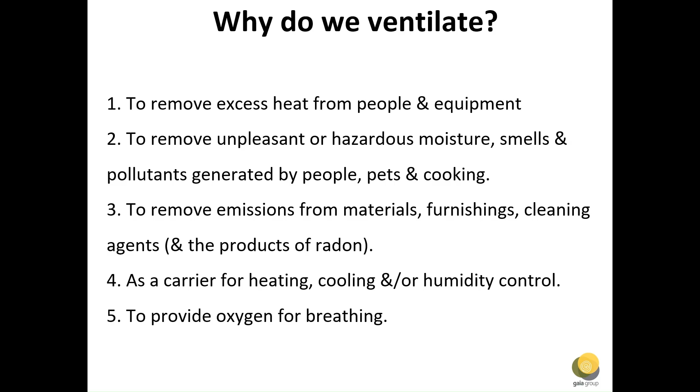So, to more recent history. Energy used to be cheap and free of adverse impacts. The energy crisis of the 1970s led to a massive increase in the price and to increasing attention to energy efficiency and to the sealing up of traditional air routes, such as chimneys in domestic buildings.

No one thought much of ventilating a bathroom or a kitchen beyond propping open a window. In parallel, there was a trend for commercial buildings to be built with deeper plans and lower ceilings than traditionally. Deep plans required air to be transferred to the centre of spaces, often through the ceiling voids, lowering the ceilings further. The mechanical ventilation systems themselves introduced pollution.

Windows were fixed closed, mechanical ventilation and cooling had effectively replaced natural systems. Temperature and humidity were regulated within narrow bands, established by the mechanical services sales team generally, and over which occupants had little or no control. This is when the fashion was for internal environments to be reduced to a profitable, artificially engineered box.

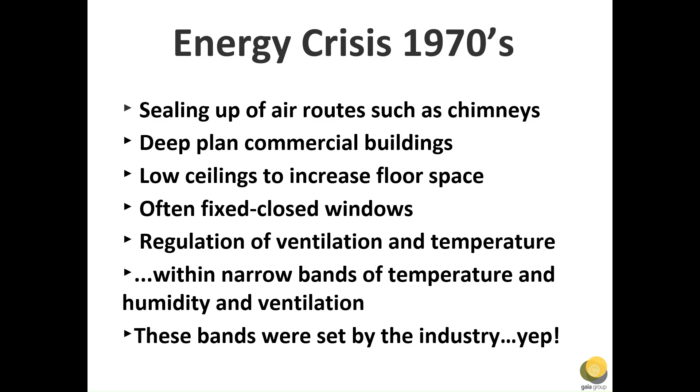It got messy. It still is. At the same time, synthetic materials were replacing natural ones, the combined cocktail effect of which was, and is still, largely unknown, although probably very bad.

Little monitoring of internal pollution has ever been done. If you want to know more about this, then I suggest and heartily recommend this film, 'Unacceptable Levels', which talks about the chemicals inside us.

The approach to ventilation came under scrutiny when ventilation was identified as a very significant aspect of the running cost and environmental impact of many buildings, largely due to the use of electrical energy.

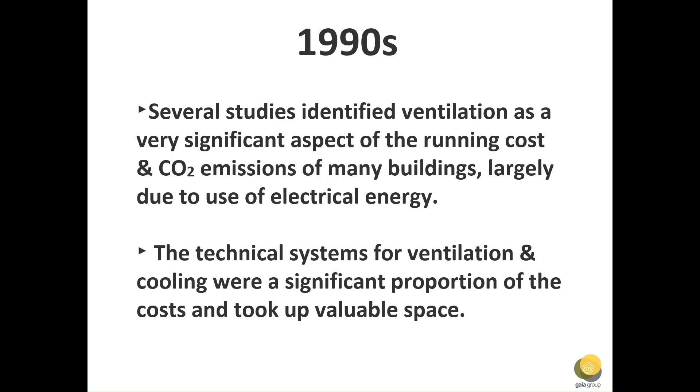Cost analysis highlighted technical systems as a significant proportion of the initial cost of buildings. 30% was not unusual, and they took up valuable space.

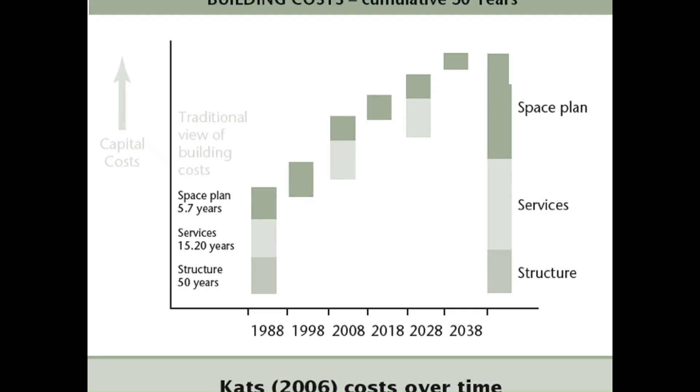Many of you will have come across this diagram that shows how the services actually have an increasing impact in terms of cost over time because they need to be maintained and replaced. There was increasing complexity.

Controls had a lot to answer for. They were often generic, as in you would come into a space and put your hand down a load of switches in order to get to your desk at the far end of the room. They were non-intuitive, not obvious, often obscured behind things, certainly inflexible, incomprehensible quite often, they had high energy defaults, and they quite often turned unneeded systems on.

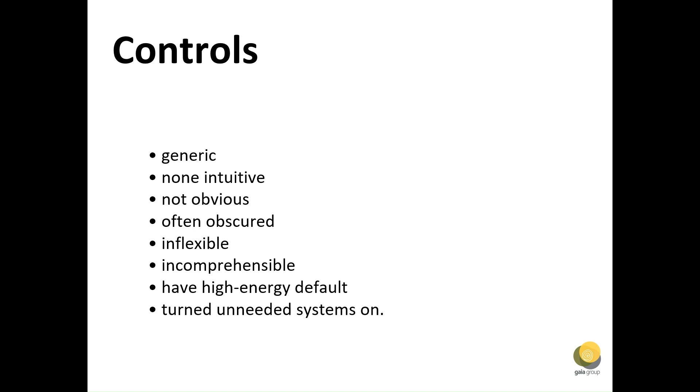Occupants were often dissatisfied with the lack of control over their environment. Poor ventilation systems were often associated with poor indoor air quality and a range of sicknesses which became known as sick building syndrome, and later building related ill health. This showed as high absenteeism in unhealthy business premises and breathing problems related to mould and moisture in housing.

Essentially, ventilation systems were using capital, space, and running costs to replace the larger, taller rooms which had performed quite well without them, and they were making people sick.

For many years, design and regulatory effort to make buildings more energy efficient focused on improving heating and insulation. As a consequence, the proportion of heat loss through infiltration has increased as insulation standards have improved. Internal and solar heat gains have increased in many buildings. Lightweight construction makes them less able to store and lose heat. And of course, the climate is getting warmer.

The outcome is an overriding, muddled message that both leaky buildings and tight buildings are bad, but necessary.

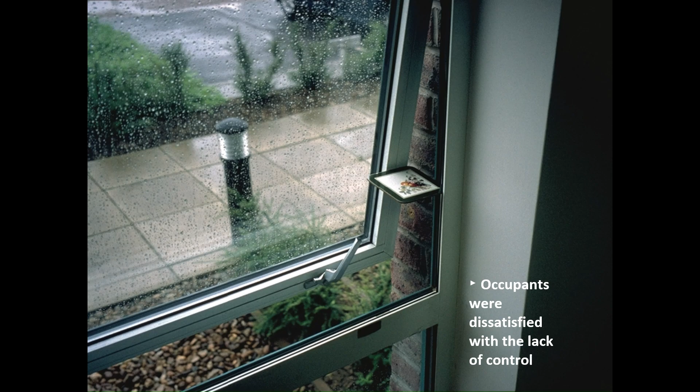Then came some research for those who were listening. There was a marvellous project called Solidar, in which the intention was to design out the building services by attention to design at the early stages. The outcomes were very useful. It showed that building costs came down, that energy demand came down by 50% or more, and that usable floor areas were actually very attractive.

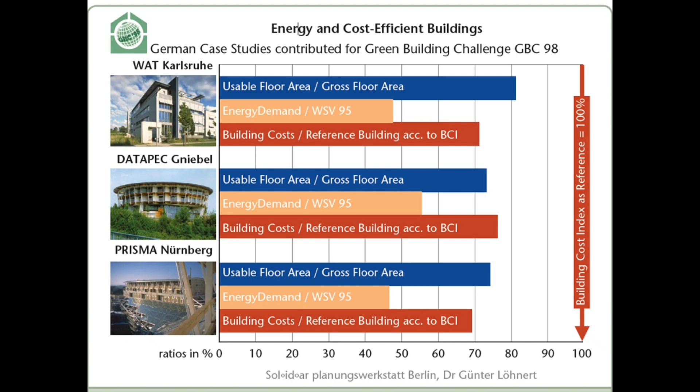It also reinforced something that I have felt throughout my engineering life and was well put by Rolf Jacobsen from Gaia Lista: you can give a lifetime guarantee for every piece of technology that you don't install.

I myself, in the very early 90s, was involved with a project at Oxford County Hall. It was a refurbishment, and the people working in the County Hall decided that they wanted to return to a natural ventilation system with local control rather than keep the existing air conditioning. They were prepared to tolerate the noise and the pollution in the city centre.

This was reinforced by the fact that they had a certain level of control within County Hall for these issues, and they wanted to set long-term strategies for traffic management to reduce that noise and pollution, which shouldn't really be there in the first place.

Within SEDA, there was some fantastic forward thinking. For example, Jed Penton put on this wonderful event looking at vital building syndrome - not what makes buildings sick, but what makes them designed for health.

I worked with Howard and with John Gilbert to produce a design guide for detailing toxic chemical reduction in buildings, to promote healthy internal environments and to minimise future liabilities associated with their disposal. It caused quite some consternation, particularly amongst the plastics community.

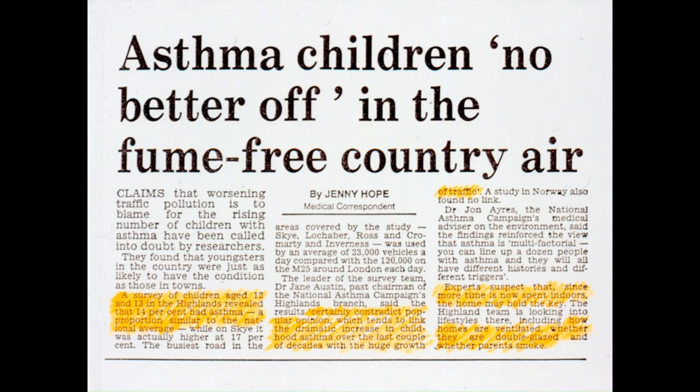There was work done on the occurrence of asthma, which was traditionally related to the external environment, to traffic and such like. What became clear was the incidence of asthma was the same on the Isle of Skye as it was in central London, and this allowed a focus to come back to common factors such as the homes that children were in and spent a significant amount of their time in, as potentially being a very strong interfering factor.

There's a rising interest in moisture management and the potential for moisture buffering materials to buffer oscillations in relative humidity. So this is an example of the internal RH and the external RH in a building in the borders.

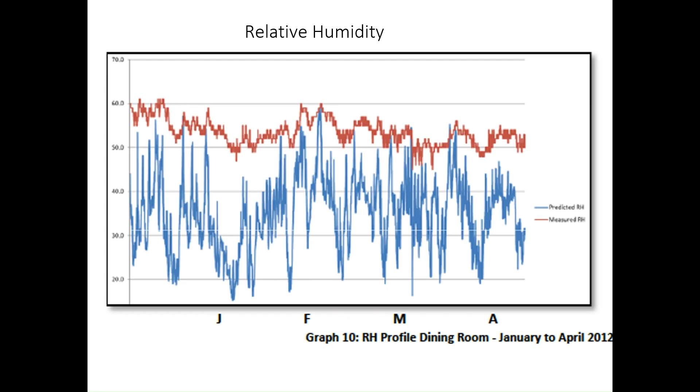It was shown in practice by designers using clay in bathrooms, which actually absorbed and buffered the moisture there, meaning that things like your mirror didn't steam up.

I also undertook some work into air quality and health for people with dementia, and this was related both to the very high occurrence of breathing related ill health amongst older people, but also to giving attention to the buildings that people were in. One of the things which is vitally important to people with mental disabilities and problems such as dementia is that they really enjoy visitor time, but unfortunately many of the environments that people are in are unpleasant and badly ventilated, and people really do not want to stay very long.

We looked at a number of design approaches to increasing the amount of air that you can get into buildings without that having a significant energy penalty. And there are some case studies that I could discuss.

The tradition of design thinking has moved again, away from fully managed mechanical design solutions to an understanding of context, natural process, and awareness of human factors. Commercial buildings have moved to much greater flexibility, hence the appearance in recent years of what has become known as mixed mode or hybrid strategies. These combine approaches rather than providing one fixed solution for everywhere.

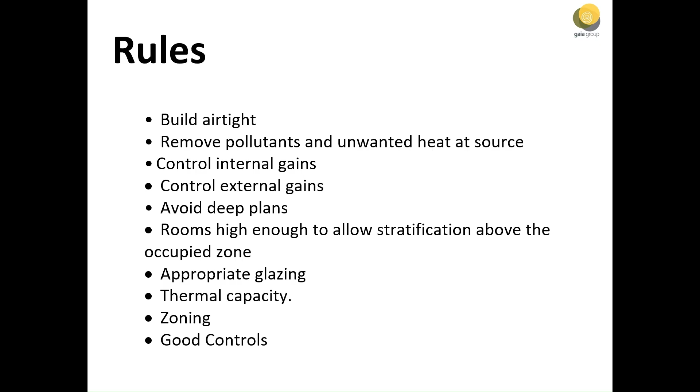Spaces need to be designed with more attention to detail in the early stages of design, and be easy to understand and control by occupants and managers. We need to consider how spaces will be used, and we need attention to eliminating avoidable heat gains and pollutants. In fact, ventilation and cooling need to be designed on a room by room basis, not a building by building basis, to meet the potentially very different requirements of different users at different times and places within a building.

This may be as simple as placing the openings in the right places, but if relying on windows for ventilation, then it's worthwhile remembering that windows are required to fulfill a very large number of tasks. They are there to provide light, to provide connection, to provide views, and if they are there to provide air, then success is probably in the detail.

There's plenty of guidance available on ventilation and cooling, but most buildings either fail completely to create indoor environments that are comfortable and healthy, or they consume lots of unnecessary energy to be less comfortable and healthy than they might otherwise be. In 2002, driven by a desire to know more about designing ventilation in buildings, particularly in schools, I organised a tour of school buildings in Norway.

One of the first we visited had a very interesting engineer. Dagfinn stated, 'Good indoor air quality is a human right.' It felt like a very different fashion declaration to that which I was used to. It sounded like the kind of fashion declaration that people with dementia, and people who work with or visit people with dementia, would really value. It sounded like the kind that teachers, school children, office workers, and people who live in their own homes would really welcome. Good indoor air quality is a human right.

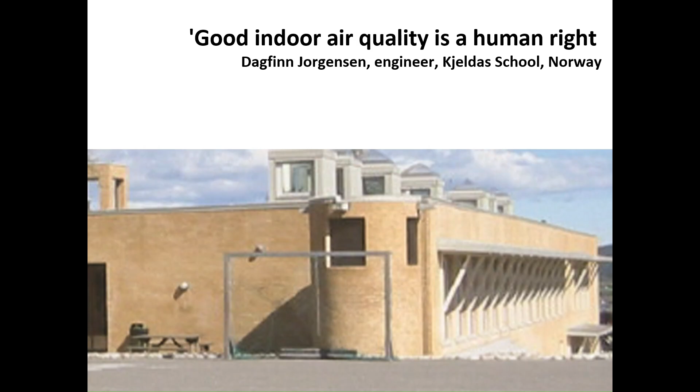The schools that we visited form some very useful case studies, and they are encapsulated in these two books, Design and Construction of Sustainable Schools, which includes German examples too. They are downloadable, I believe, from the SEDA website. Any problems, ask me, I can get you them.

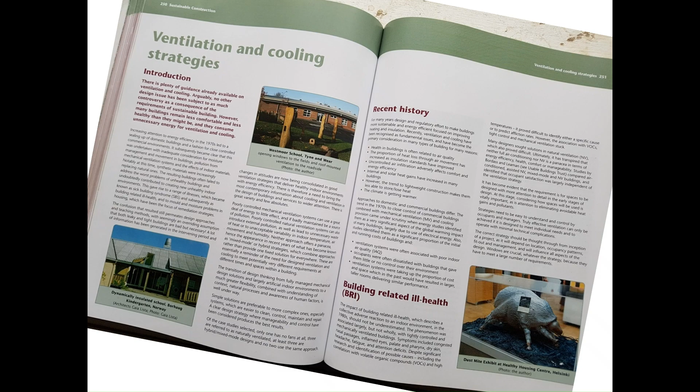My email is sandy@gaiagroup.org. And then there are a whole load more ventilation and cooling examples in my book Sustainable Construction, the second edition, and actually some interesting ones in the first edition that might at some point be worth revisiting. These include Vanse School, with a rather nice culvert system and a Bernoulli effect, a dynamic insulation at McLaren Borhaug, and the Baerum care facility for the elderly.

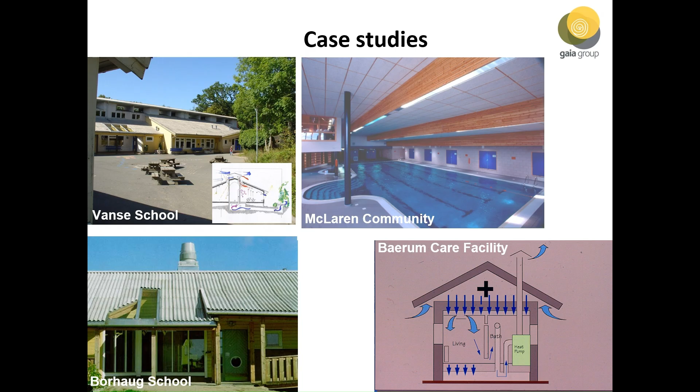Building 2226, a housing project at Toll House Gardens, Kjeldas School, housing designed as healthy housing in Zurich, Plummerswood passive house in the Borders, and then there's work on the Bullitt Center, which of course had the red list for material specification. All of that can be found in Sustainable Construction Volume 2.

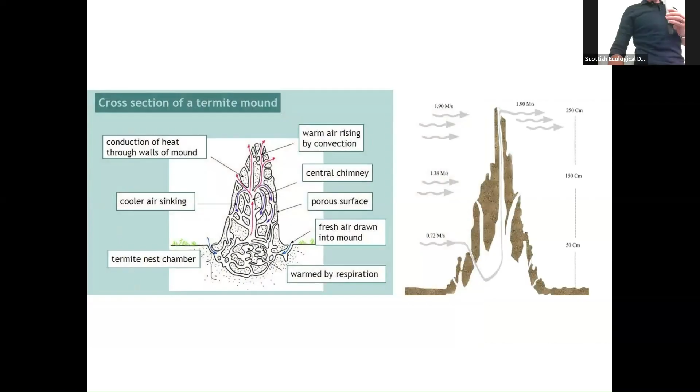And then there's termites. You've all heard about termite mounds, and you know how they draw in cool air and use it to drive air through the building. But one of the things these have in common, and which Sandy touched on, and I know Janice is going to touch on as well, is the materials these are built from. These are not hard, impermeable materials.

So what we build our buildings from is a fundamentally important part of that ventilation strategy too, to help buffer the moisture, to help store the heat and put it out when you actually need it. And that's what nature does intrinsically.

Right, last thing. I work for an organisation called NatureScot, and this is a great title, I'm their net zero team leader. We have to retrofit 40 buildings, and my challenge is how to do all this good stuff I'm talking about and build it into the architecture. So that's going to be a good challenge. Keep your eyes peeled for what we do. Thanks very much.

I won't talk at length about ventilation itself because there is a lot of expertise in the room who will do that. I'm going to talk around the issue of why it's important to get it right, and who might be most vulnerable when we're thinking about designing solutions.

So that looks like it's all working lovely.

So yes, for those who didn't hear online, this is really my favourite quote of the week. This quote comes from 1965, so to give a little bit of context, this is around the time when the civil disability rights movement started to gain traction, and the organisation who published this wonderful journal at the time called The Magic Carpet, it became the Disabled Drivers Association. And this quote was in the editorial of one of the 1965 issues, and I'll read it for anyone who wants to hear. So it says, 'To hell with the half-witted architect who dreams up fabulous ornamental buildings with not one scrap of common sense about them. He may be a great man or woman, but how much greater he could be if his dreams were less like nightmares to a percentage of the population.'

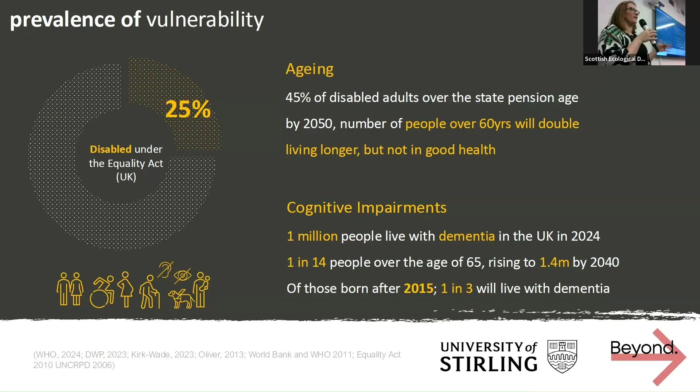One of my background areas is working in dementia design, so I think it's important to think about this bracket of vulnerability and people who live with cognitive impairment. At the moment, approximately 1 million people in the UK live with a type of dementia, but this number is set to rise. By 2040, we're looking at a rise from 1 million up to about 1.4 million. The World Health Organization identified that of those people born after 2015, 1 in 3 will live with dementia in their lifetime. So the prevalence is on the rise as well.

I particularly liked Sandy's slide with the quote around air quality being a human right. I talk a lot about rights in my PhD, and it's about remembering that disability rights are also human rights. Rights are rights no matter who you are or what type of vulnerability you have. When we think about what those rights are, it's about dignity in your life, choice, independence, and the ability to have equal participation in society. So if you're particularly vulnerable, you might need additional support, or additional considerations in the design process of buildings and places to be able to enact your own human right.

Over the next few slides, I'll give some examples of the way in which we might see inequalities through the use of ventilation in an inappropriate way, or just not being considered fully to be inclusive. In the case of people living with dementia, there's some quite interesting research that's come out recently, and it's very much in line with Sandy's wonderful book around the quality of indoor air.

The first point is about discomfort. When you're sitting in an environment where the indoor air quality is poor, you experience discomfort. Some really recent research has indicated that this level of discomfort within a care environment is very much likely to increase stress and distress behaviour responses. So from a carer perspective, it becomes a little more difficult to support people who experience this sort of indoor discomfort.

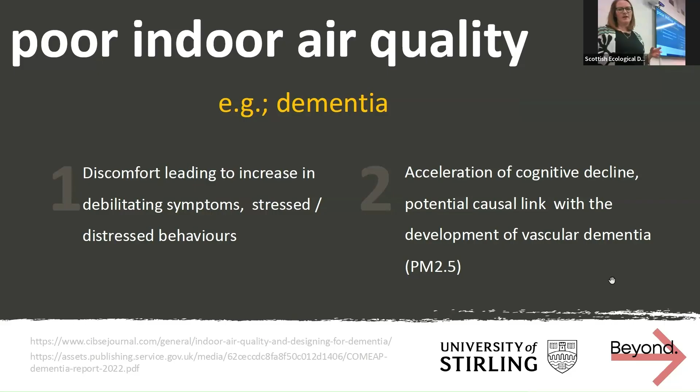Thinking about controls, this is maybe kind of a common sense type of thing. But if you're somebody with reduced mobility, for example, you might not be able to easily access vent controls. You might feel disempowered by that, and that might increase your reliance on support, where otherwise you might be very independent in your life. If you can't reach the trickle vent at the top of your window, or the window behind your kitchen sink because you've got a counter in front.

I myself know that just through experience of having a giant baby bump in the past, and that's coming to me soon. That idea of the disempowerment experienced by people who find controls inaccessible is massive. There's lots to go into detail there, but I'll keep moving on.

But the other end to think about is people who live with reduced mobility, again, spend a lot more time in an indoor environment, and they're much more susceptible to developing related health conditions and illnesses, because they're spending that much more time indoors as well. So there's sort of a duality of issues happening there.

When we think about thermal comfort in relation to ventilation, again, another kind of common sense slide, but thinking not just about older people, but about infant babies and children and the risks they face if they're in a space that's too hot for them or too cold. This is all related to getting the systems right and getting them user friendly, and thinking about that range of people who are going to be in a space.

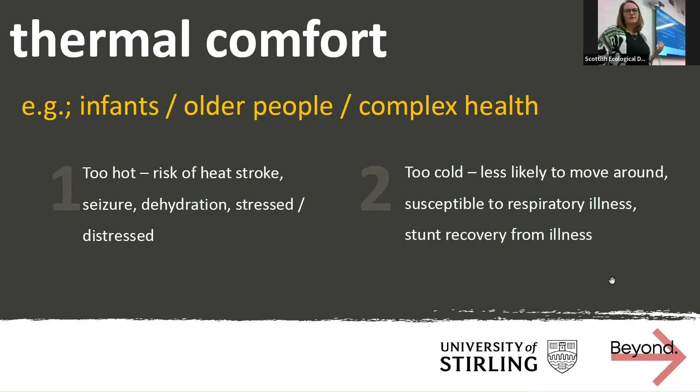When we get to the 'who cares' part, I won't be able to go into lots of theory around disability theory and what the social model is, but in a very quick snapshot, the social model of disability situates disablement as something which is a result of external barriers which interact with a person's impairment or health condition. We must understand the disabling power of the built environment, that people are disabled by barriers in the built environment. That's really the message to architects whenever you're thinking about creating accessible spaces, spaces that cater to people's needs or are considerate of a range of needs.

It's the power of the built environment to disable people that is really massive. So I've reiterated that point here when we think about the cross-section of our population and the disabling power of the built environment. That's why it's important to architects and designers of places and anyone responsible for the built environment, because the social model of disability is not a new concept. It's been around since the early 1960s and defined formally in 1983 as a term, but people have been talking about the reason why they feel so disabled being all of these external factors.

The final quote of my presentation is around the World Bank and the World Health Organization's report on disability. The last one they released was back in 2011, which feels like quite a long time ago. I think there should be an update, but that and the UNCRPD, the UN Convention on the Rights of Persons with Disabilities, they all identify the environment as having a huge impact on the experience and extent of disability.

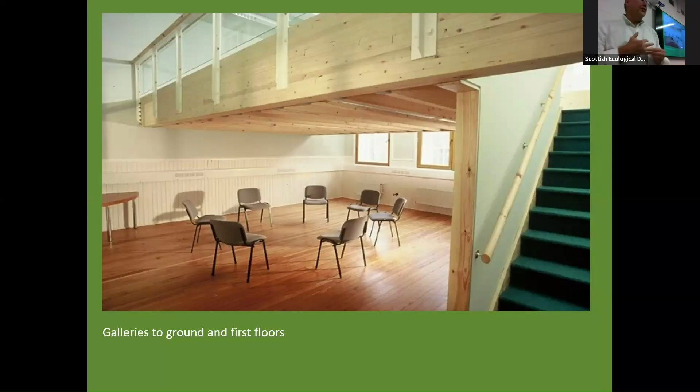Obviously all the windows open, so in summer when you're not heating the building, you open the windows. On the ground floor and first floor they have mechanical heat recovery as you'd expect. It's also on the top floor. It's 3 floors mainly, but the top floor also benefits from a solar slate system.

The ideas behind this were developed by a guy called Kerr McGregor, 20, 30, 40 years ago - sadly no longer with us, a really clever and interesting guy. He was looking at how you control the buildup of moisture in older housing association and local authority flats and houses. He was looking at MVHR as a moisture control more than how it's being promoted at the moment, particularly looking at popping these things into communal stairs in blocks of flats.

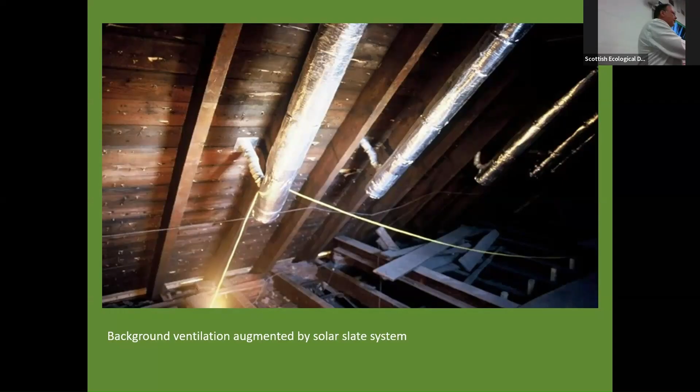What this does is suck air in from underneath the slates, and that's the intake air for the top floor MVHR system or air handler. Obviously in summer when it's warm, it clicks over to fresh air from elsewhere - you don't want to bring in warm air. It's astonishingly efficient. This part of the building has been heavily monitored by both myself and others.

This particular slide comes from around 2000 when the BRE monitored it, and it shows over a period of time in the middle of winter the air temperature coming off underneath the slates, which act as plate heat exchangers effectively, against the outside air. There's one day in there - for those of you online, I'm about to point at the slide, you won't be able to see it, but it's the one where the lines are at the top. I think it's somewhere over here, sometime in January.

Outside air temperature is 0. The air coming off underneath the slates is 21 degrees centigrade in January - one of those really bright, sunny winter days. So you don't need any additional energy to heat that air. It makes a huge difference.

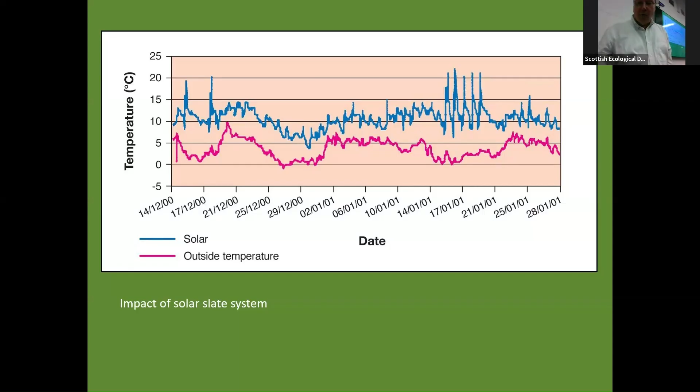I also got the opportunity when doing my PhD to go back and do a post-occupancy evaluation of the building, using 3 different methodologies - more to learn about those methodologies than the building, but we still learned some interesting things. One thing I was able to do was monitor temperature and relative humidity in some of the spaces - not as much monitoring as I would have liked, but still it's there. And these are the results.

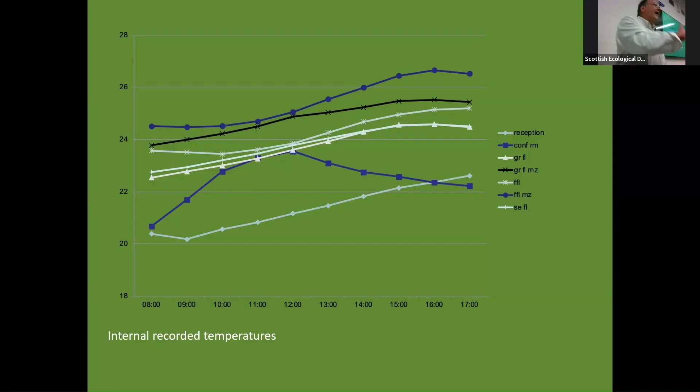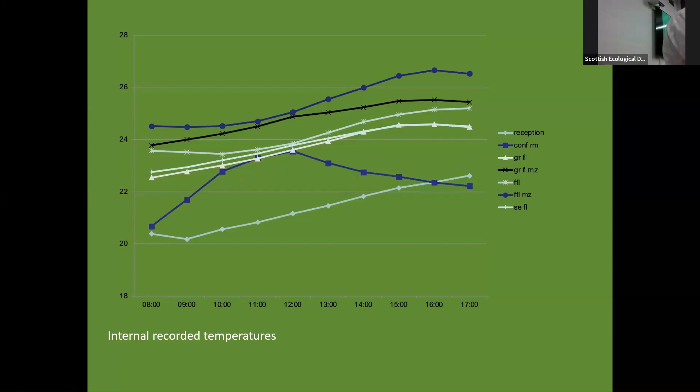As part of the post-occupancy evaluation, alongside doing all this monitoring, the user satisfaction questionnaire does loads of Likert scores as always, but it also allows people to make comments. Predominantly from the southwest corner, there were all these comments from people saying, it gets too hot in the summer, but my colleagues won't let me open the windows. That's almost a direct quote. And you can see that it's getting to 26 degrees.

What the facilities management team in place at the time had forgotten, or hadn't been told by the previous facilities managers, was all they had to do to help - not solve, but at least reduce the impact of this issue - was at night go around and open all the inner windows.

So you've got an outside window, sash and case, with a U value of 5.7. You can leave that closed, but you've then got another window on the inside with a U value of 1.1, which you can open without any impact in terms of rain or wind or whatever. And overnight, you shed 4 degrees.

So the facilities team have now been reminded of this, and that's what they do. It provides a zero cost management solution.

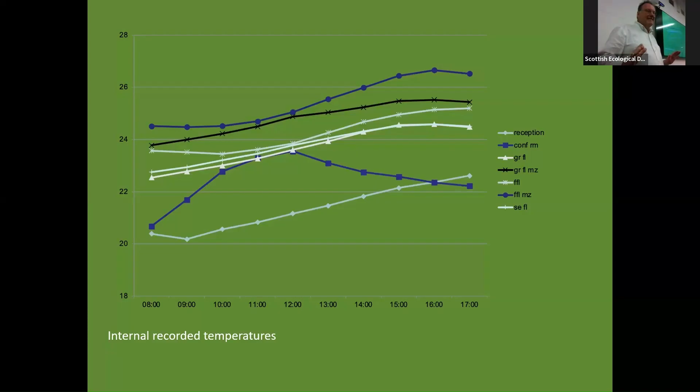One of the things I think is interesting about that, and it goes back to the discussions I was having with the client right at the beginning, is having the opportunity and taking the time to have a risk-based conversation with your client about whatever you're designing. Some clients are incredibly risk averse. I've had clients say, look, I want you to give me a system that is turned on and I never touch it and it does everything for me. I usually say at that point, I don't think you're the right client for me, because if you're not prepared to manage your own building, don't expect the best possible results.

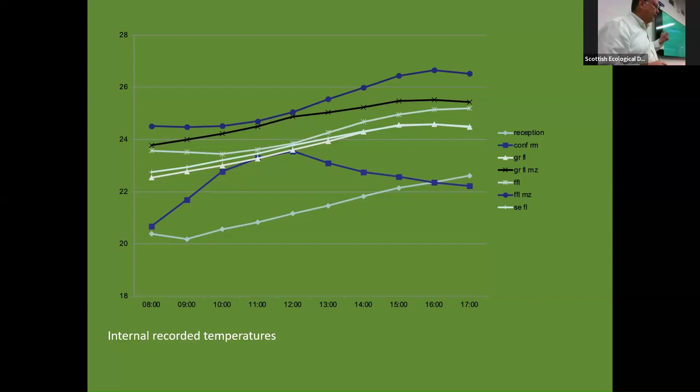But it reinforced some of that sort of risk-based conversation that I had with the client, which I'll illustrate with the next case study. I've got, I think, one more slide just for this - yeah, one more slide on this one.

Bearing in mind, a lot of the studies that I've done have been for educational buildings, because it used to be part of the funding for new build educational buildings that you did one of these, and academics just like doing these sort of things. So predominantly they're across education buildings, and predominantly a lot of those buildings will have started out with some green aspiration attached to them.

Now, like I say, this was done on the very hottest day of this particular year, so people were probably quite grumpy at the time, and they hadn't rolled out, or had forgotten, the solution to it.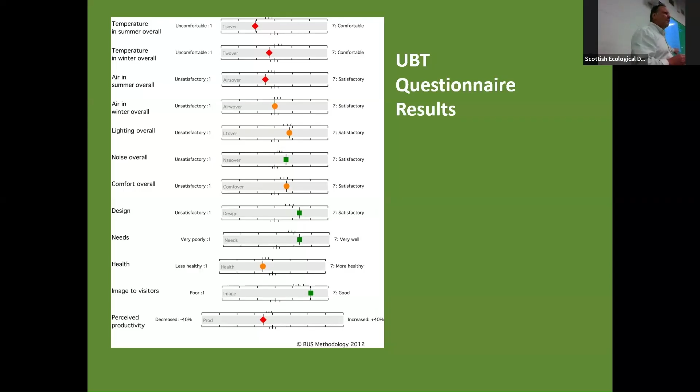But again, it comes back to what you've heard in presentations before - people's comfort levels directly impacts on their sense of well-being, their productivity, their learning outcomes, their health outcomes, all of those things. So it's vitally important to get right.

Would I do it this way now? I mean, this is getting on for 30 years ago that this was being designed. I'd certainly do some things differently. I'd still want to have that same risk-based conversation of how are we going to make this work?

How am I doing on time? Am I okay?

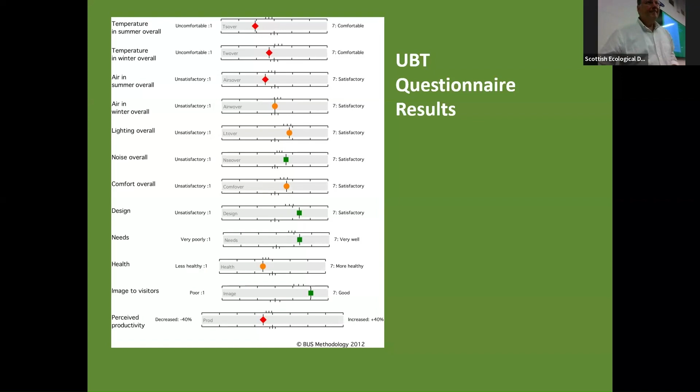On to the second project. This is a building, the Tullis Russell Environmental Education Building in Fife, which was completed in 2011. Therein lies another tale. But a brilliant brief to be given as an architect, which is design a building which explains, hopefully, or is as sustainable as we can make it, and then explains how it does it, and has an exhibition that looks at all of these aspects.

I should have said with Norton Park, by the way, part of the brief was that we did a huge amount of work specifying the most benign materials we could possibly find. So natural fiber carpets, silicate paints, etc. There was virtually no preserved timber went into Norton Park, other than the windows and the glulams, which we couldn't stop being preserved. And that was applied to this building as well.

So lino flooring instead of vinyl flooring, all that sort of stuff. Linseed oil paint instead of white spirit-based paint. Jim Johnson, our friend, the late Jim Johnson, said a wonderful thing when he visited on a SEDA event. He walked in and looked for a few minutes and said, 'This smells really nice.' That's genuinely one of the biggest compliments I've ever had, because we all know what the smell of a new building is like, and that's all that chemical shite that Sandy was telling us about that goes into buildings.

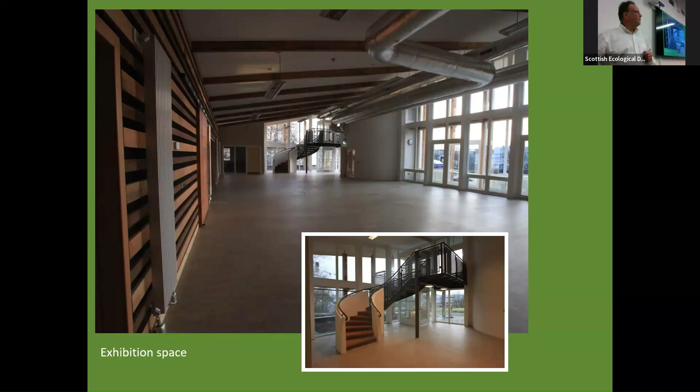We had movement detectors too. So if we had one big conference room or a presentation room, which was a fundamental requirement of the client, if everybody on a school trip goes in, sees a film, has a presentation, then goes out, gets on the bus, drives away, the movement detectors say there's no one in this room.

Right, I'll turn the ventilation off. So it's all about having that conversation with the client to say, how are you going to manage the building? How do we put in controls that will help you manage it in the way you should, but also be aware you're going to have to be reliant on manual controls.

And I'll just quickly go through how the building is mostly passively ventilated. So one of the things we did, we obviously built an architectural model, and we did a 365-day sun analysis. We ran a program which showed how far the sun penetrated into the building in the middle of summer and the middle of winter. And that dictated the overhang.

The building faces southwest. The main glazing that you can see on the bottom left-hand side faces southwest. So that overhang is designed to ensure that in the winter, the sun gets all the way into the building. There's a solid floor, there's a solid wall at the back, lots of thermal mass, which soaks all that up. In the summer, you get significant amounts of shading, so you don't get too much in the way of solar gain or glare.

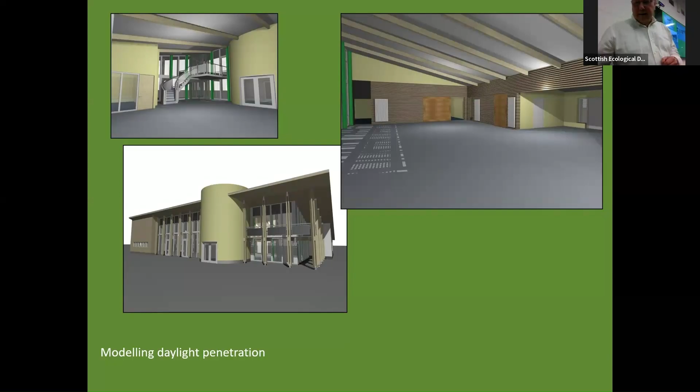The other thing about that elevation, bottom left-hand corner as you look at it, the front of the building is formed from a solar chimney. So you've got two lots of triple glazing to create a slot, and that slot creates a vertical column of air when the sun comes out. There are vents at the top and vents at the bottom.

So in the summer, when it's hot, you open the vents at the top and the vents at the bottom, and then the vents on the north side, and you pull air with the stack effect right the way through that big space. In the winter, you can close it all up, and you've got two lots of very high performing glass between you and the outside world. I don't think the building ever dropped below 10 degrees centigrade with no heating on.

The other thing you see in the slides on the right-hand side, I touched on this before, there's two air handlers, one for the big space, one for the conference space. And they are deliberately oversized, so they can run very slowly, which makes them very quiet. But it also means you can control the speed relative to the CO2 system, the CO2 level in the air that you're extracting.

And again, the control is all about, okay, if you want me on, I'll come on. But if I decide you don't need me on, I'm going to turn off. And if I do, and you want me on, you've got to turn me back on manually.

Again, it was all this idea of, I've got a coach party of kids coming. They're all going to pile into that conference room. Because of its shape, you don't have a huge amount of vertical space in it, so it's going to get stuffy. I'll turn the air handling on so it doesn't, and then it will turn itself off when they disappear.

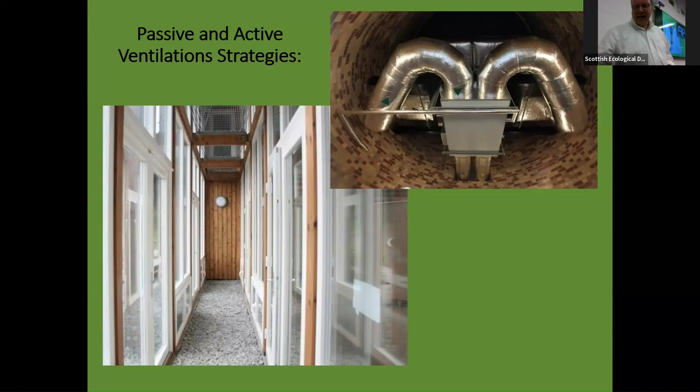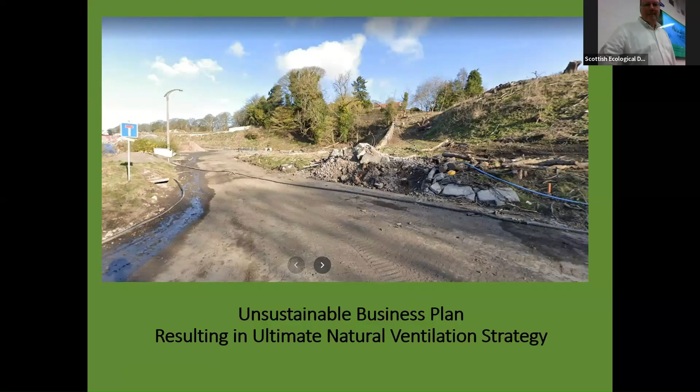So, yeah, that was the tree centre. Now, all of this is good, and you may be wondering why none of you have ever visited it. And this comes to the last slide, which is, if you have an unsustainable business plan, you end up with the ultimate form of natural ventilation. So it's no longer there. Which is very sad. But there you go. That's me.

Yeah, so my publication was about that we quite often get people ring us up. So let me rewind a little bit, because not everybody in the room knows who I am or where I work now. I don't work as an engineer anymore. I'm a researcher here at Glasgow School of Art in the School of Architecture. The research unit was set up 32 years ago to do building performance evaluation in occupied buildings to see how they perform.

When we first started, we were looking at existing buildings which had lots of mold, but more recently we're moving on to newer buildings which are overheating, they're getting too hot, they're uncomfortable for people.

So we go out and measure pretty much everything you can think of: the temperature, the relative humidity, the carbon dioxide concentrations, the indoor pollutants, the volatile organic compounds, particulate matter, daylight, energy, all sorts of different things we check to see how things work. And so we build up this big bit of knowledge.

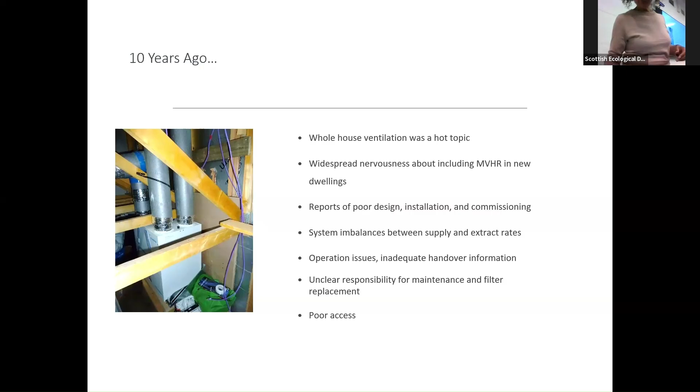So we were, okay, yeah. We found out a lot more about the Gannochy Trust, worked with background information, met them, and then were introduced to the design team and Jessica as well. MEARU were embedded in the design team, which is quite unusual, to impart building performance evaluation information, and also to help talk about the building and how do we create a building which is less harmful.

We had funding from the Gannochy Trust themselves and the Construction Scotland Innovation Centre, who are now BEST. The Gannochy Trust was set up, and the first houses built on the estate were in 1923. In 1923, A.K. Bell, who was the owner of those houses, was really adamant that ventilation was key to health in these houses. This was a plaque that was in every bedroom 100 years ago.

100 years ago. Ventilation means health. And Jessica touched on that earlier with the inequalities.

So we formed this collaboration, and we had workshops and design team meetings, and we wrote a guidance document which was available on the Construction Scotland Innovation Centre website, which gives all the lessons learned from the BPE.

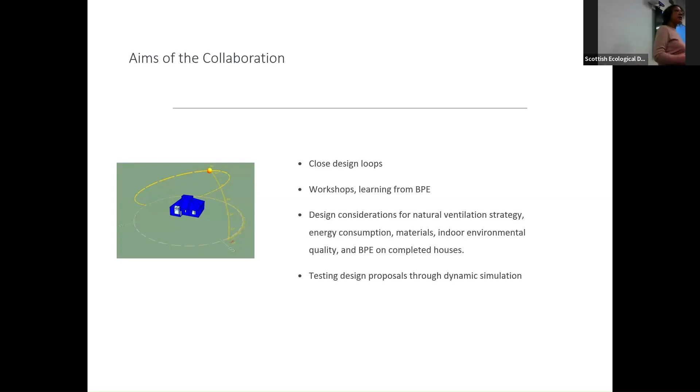So as part of the design, we were testing lots of different ideas come up and tested the design proposals using a dynamic model, and we used dynamic simulation. And I was looking back through a little book earlier. I performed over 400 iterations on one house type. You know, so it's really involved. It's really intense, the work that you do with this.

So as part of the design stage, we talked about materials. We talked about how to select materials, as Richard had mentioned, wood fibre, paints, non-toxic treatments, underground insulation. We talked about loads of things. We talked about windows, double glazed, triple glazed, timber, PVC.

PVC's out, so timber frame windows. But the biggest conversations that we had were around ventilation, because ventilation means health. So we did a lot of background research, and we worked quite closely as well with the architects, and we worked closely with the building services engineer. And we came across, you can see it again.

And that was coupled with a passive stack ventilation system, which is controlled by the CO2 measurements in the bedrooms. So as Richard had mentioned, the CO2 levels, you want to try to keep them as low as possible. And at the time as well, through our research, we've been doing quite a lot of work about ventilation in bedrooms, that people, when they're asleep, can't adjust the windows. The ventilation in bedrooms came into the building regulations as well, so we needed monitors. So we connected it up to the bedroom with a control, a simple control with 2 buttons, so it made it easy to operate.

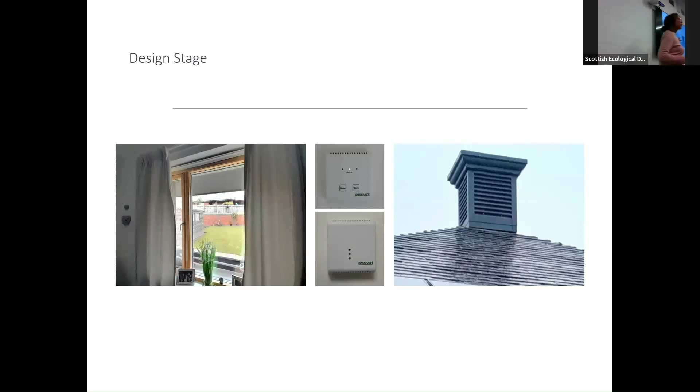But alongside that, we talked about shading. So all of the front elevations of these buildings face southwest. So there were large overhangs, and we did the dynamic simulation model to see whether it would feel dark within those spaces, to check the daylight factors.

So the shading keeps the sun off, which means it keeps the heat out in the summer, which helps to reduce overheating. So the architects made a lovely feature at the front and back of these houses as well, they call them sitooteries. So people can sit outside and look at people walking by, but also at the back of the houses, people actually put their washing out there when it's raining, so they've got shelter. So it provided a really good environment.

Also, we talked about a roof light on the buildings, which was allowing to help purge vent in the summer for when it's warm as well, so people can cool the houses quite easily.

Overnight with night ventilation. But one of the biggest things that we discussed was the ceiling height. What should the ceiling height be? We ended up with 3 options, and this was our midway option. So you can see that the rooms have quite high ceiling heights, there's a large volume within those spaces. So that formed the strategy.

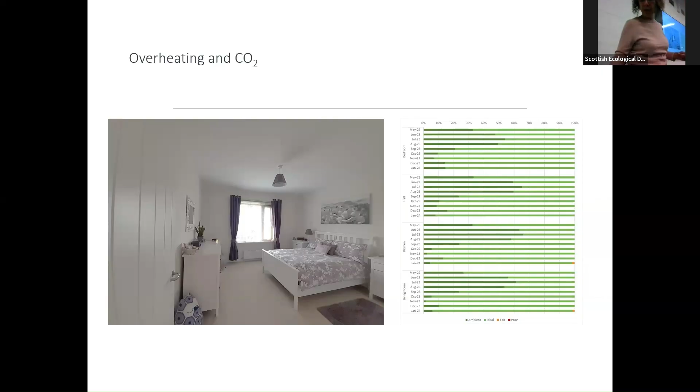We also looked at the mechanical systems in the house, because for building regulations you have to have extract fans in the kitchens, bathrooms, and utility rooms. Every house also had a separate utility room big enough for the clothes area, so people can hang their clothes, and everyone had an open window as well. We tested all of the extract fans for their flow rates, and we asked people how they operated them.

These have to be cleaned and maintained, and tenants can't do that. So even though it's a really good project, there are still a few things we can learn from this - put the extract fans lower down so people can clean them. The Ganachie Trust said, yeah, that's a problem, okay we'll deal with it. We are going to do the maintenance on these fans in every house, going around to clean them, because they said, how can our tenants get up and do that?

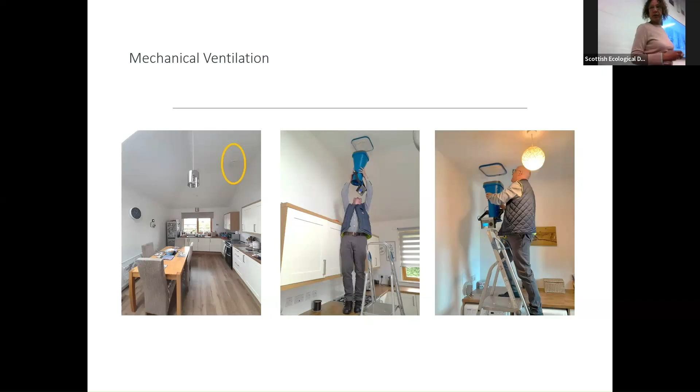So just to recap, the design strategy aimed to reduce indoor pollutants. It wasn't just about the volatile organic compounds, it's also about the heat and humidity, which are all indoor air pollutants, and also the ventilation. Overheating wasn't measured in any of the homes, and CO2 was within acceptable limits. But the dynamic simulation was key to helping inform the design all the way through, and there was just so much information that we got from that.

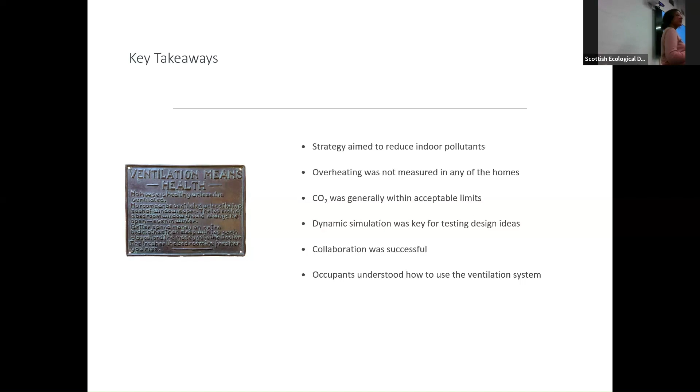The collaboration was really successful between the client, the contractor, the architect, the service engineer, and the quantity surveyor, because the contracting team had been taken on right at the very start of the project. So they understood the goals of the project and its importance. They were in the workshops that we held as well, and most importantly, the occupants knew how to operate all of the systems.

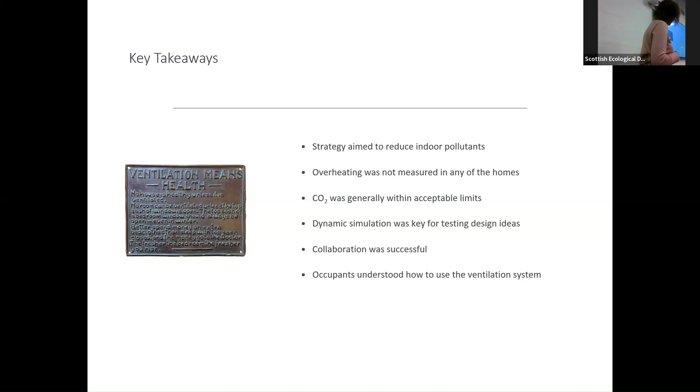I think I'm just going to leave it there and answer any other questions, but I put a link you can take down. This is on our GSA, our research repository, and this is a link to the report that I wrote as part of this project, which is lessons from building performance evaluation. So thank you.